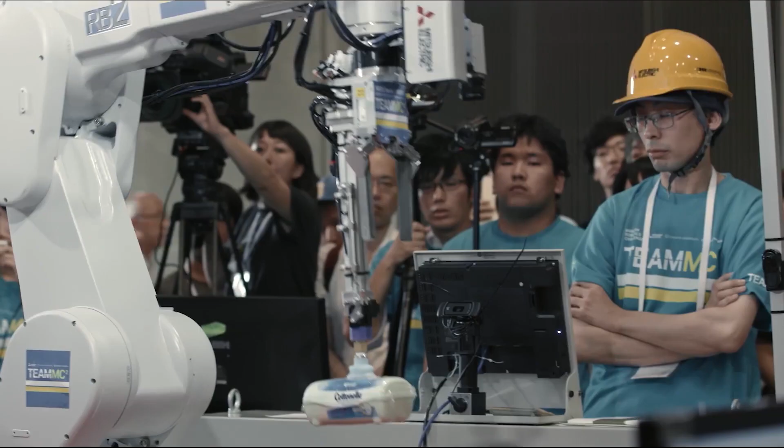Robots are the perfect workers. They don't get tired, they never complain, and they always do as they're told. Today, robots are responsible for many things like assembling cars, keeping warehouses in order, and helping perform delicate surgeries.

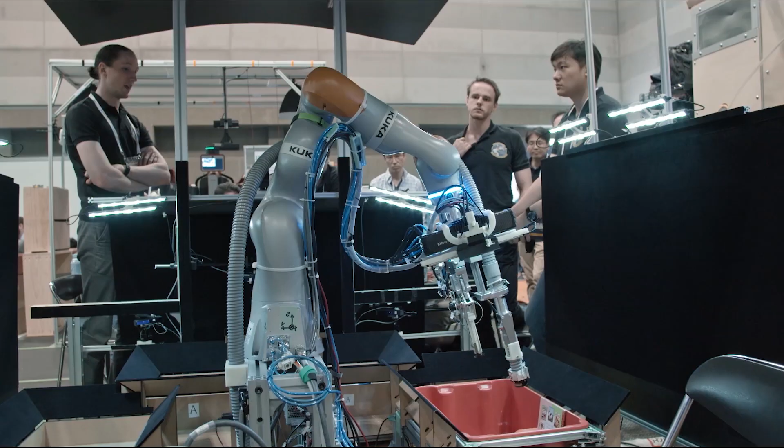But most robots of today are not humanoid. They look nowhere near like a person. Most of them are specialized arms holding specialized tools.

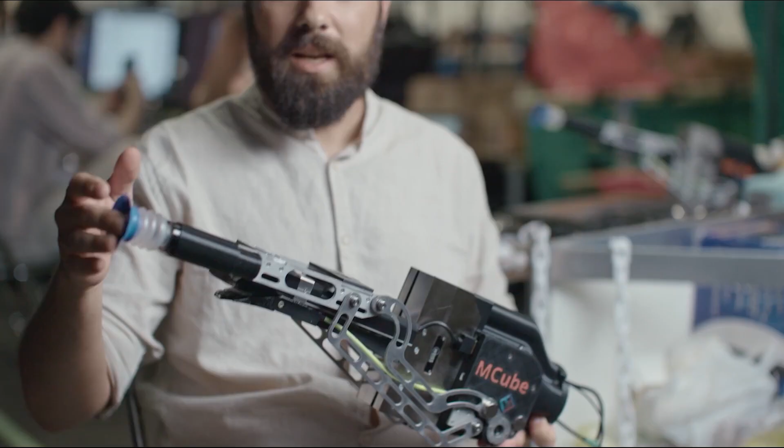If you're a fan of science fiction movies, you may have seen a number of films which have robots as the stars of the show. These movies depict robots as having the shape, the form, the movement, and even the speech of humans. That's the dream. Today, there are very few robots that are designed to look and behave like humans.

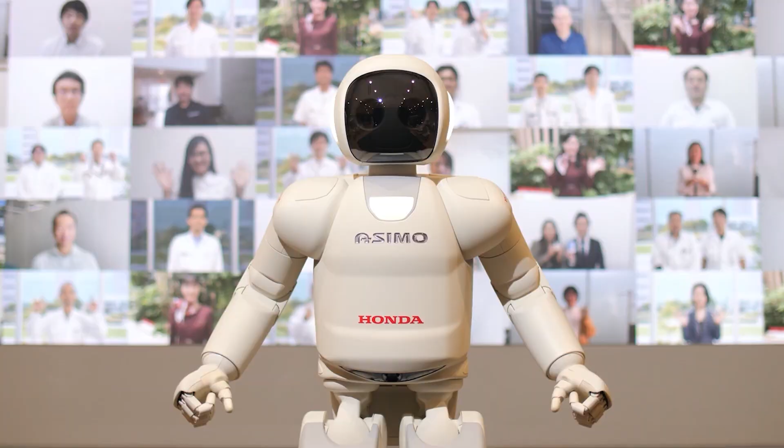One of them is Asimo, the humanoid robot created by Japanese car maker Honda. It's clunky, it's slow, and it still needs help keeping itself upright.

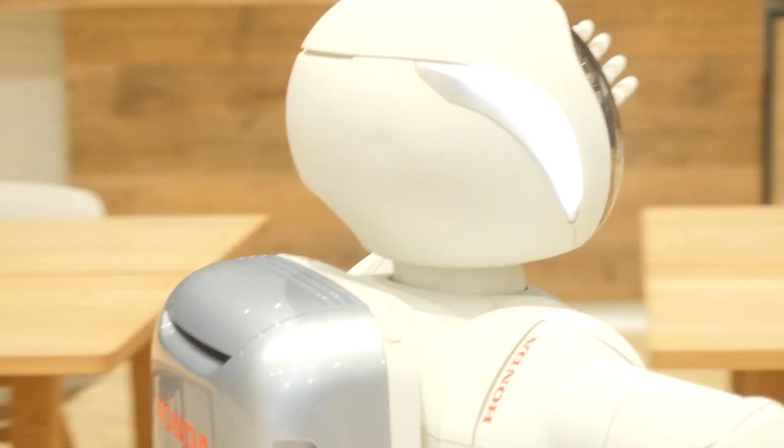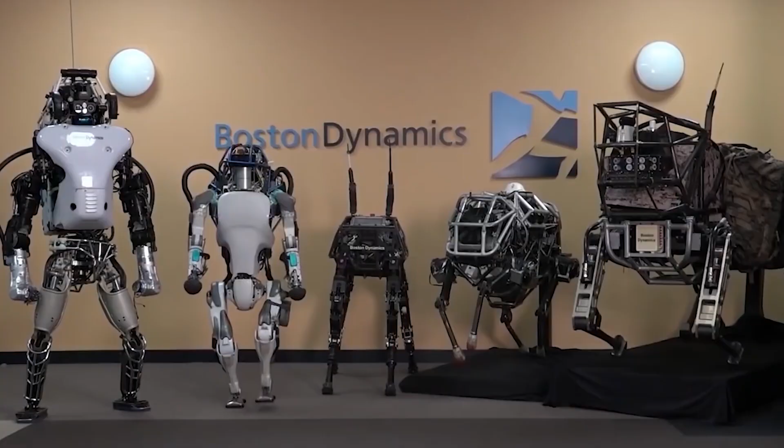Now, there are two companies taking center stage in the field of robotics: Tesla and Boston Dynamics. Boston Dynamics has been making rounds in the news the past few years as they continue to develop a four-legged robot called Spot, which can run fast, like a horse.

Tesla, Elon Musk's electric car company, is the newest kid on the block. Just last month, the company unveiled its Tesla Bot, which looks very much like a human being. Only thing is, it doesn't have a face.

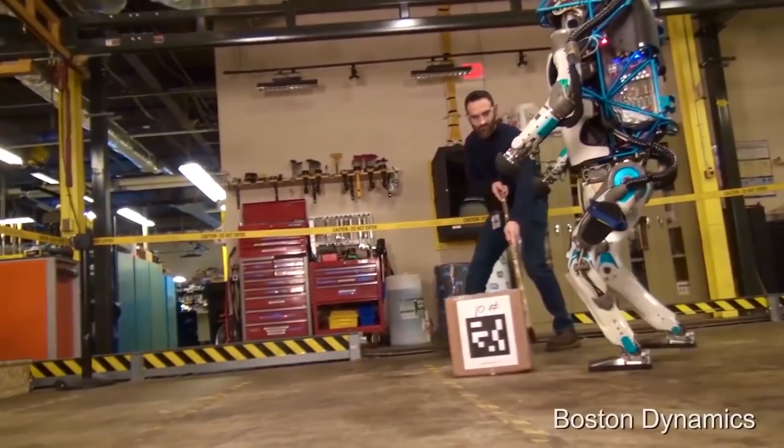On the other side of the coin is Boston Dynamics with its Atlas robot. This is also humanoid, but not as sleek looking as the Tesla Bot. However, Atlas can perform some impressive physical maneuvers.

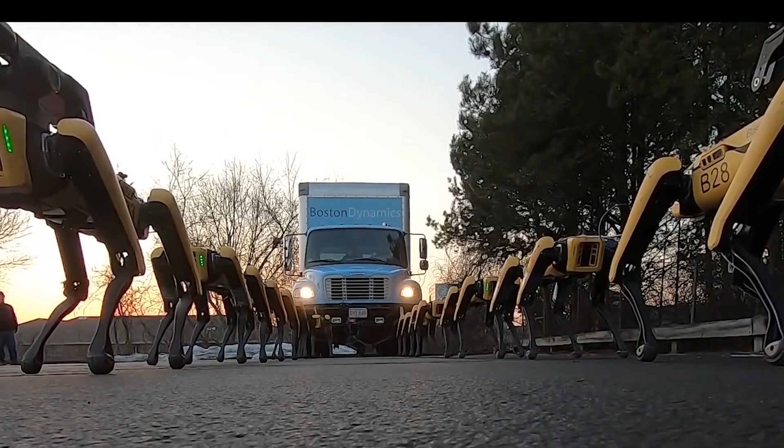So who is poised to win the robotics race? Will first prize go to Tesla, or will it go to Boston Dynamics? Let's find out more about this battle of the bots.

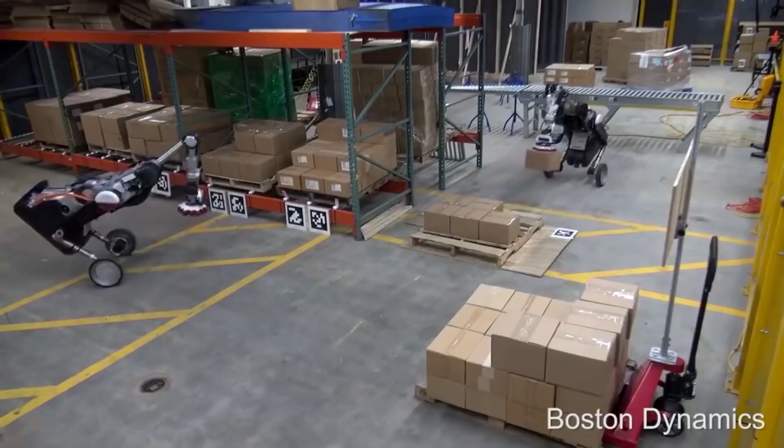Machine workers. For Elon Musk, there are lots of jobs that need to be done, and humans just don't want to do them. He intends the Tesla bot to do tasks which are unsafe, repetitive, or boring for people. That way, Musk hopes to end the shortage of labor.

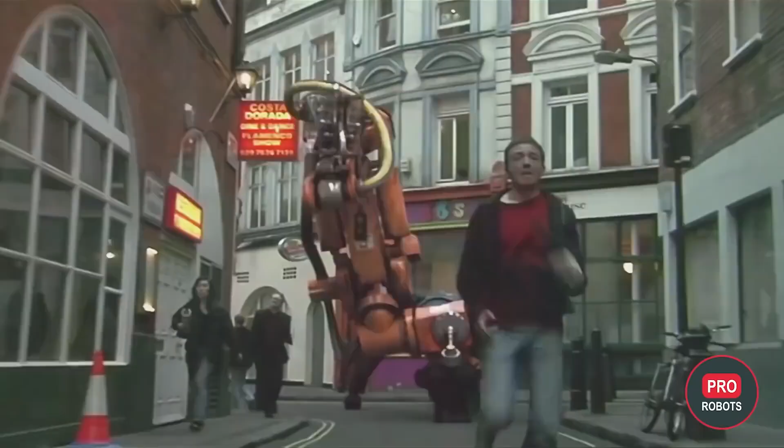The Tesla bot is 5 feet 8 inches tall, and it weighs 125 pounds. Not as heavy as most human beings. Musk doesn't think the bot is too threatening, saying, with a laugh, you can run away from it and, most likely, overpower it.

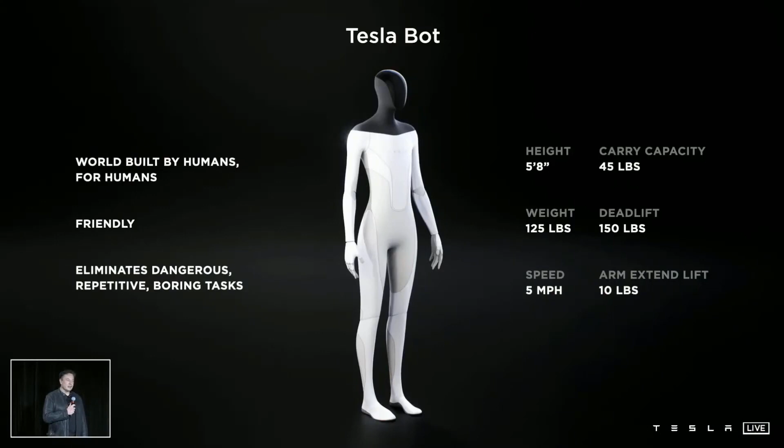But during Musk's presentation of the Tesla bot last month, he didn't give a tech demo. We don't know what the bot is truly capable of yet. Why? Because the Tesla bot has not been built yet. The bot that went on stage during the presentation was a mascot.

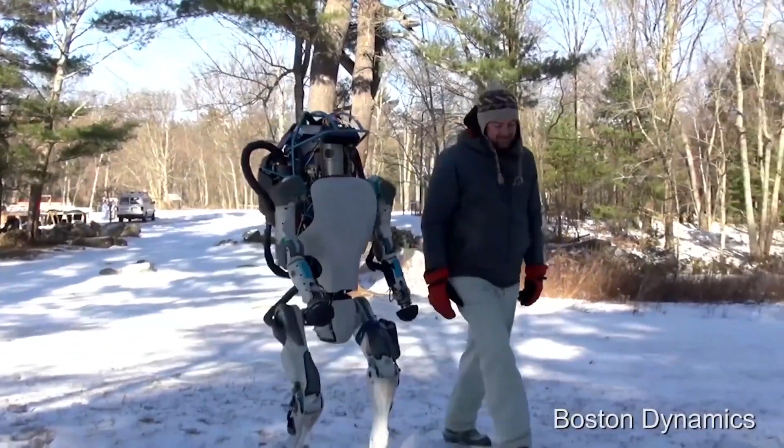Contrast that with Boston Dynamics' Atlas. A video in the company's official YouTube channel revealed the technical capabilities of this humanoid machine. The video, called Partners in Parkour, showed two Atlas robots running through inclines, jumping on platforms, balancing themselves on a narrow beam.

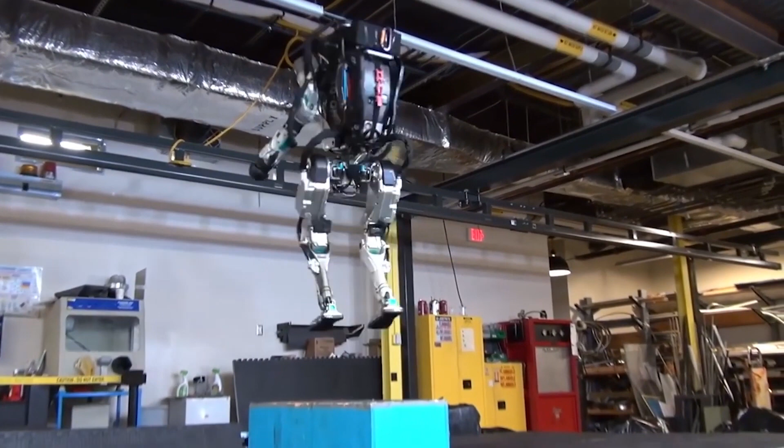And the best part, doing not one, but two backflips. Feats like this would have caused other humanoid robots to fall over. Asimo could only dream of doing such tricks. The balancing capabilities of Atlas, though, allow it to do different tasks with ease. It can carry heavy stuff without tipping over, for example.

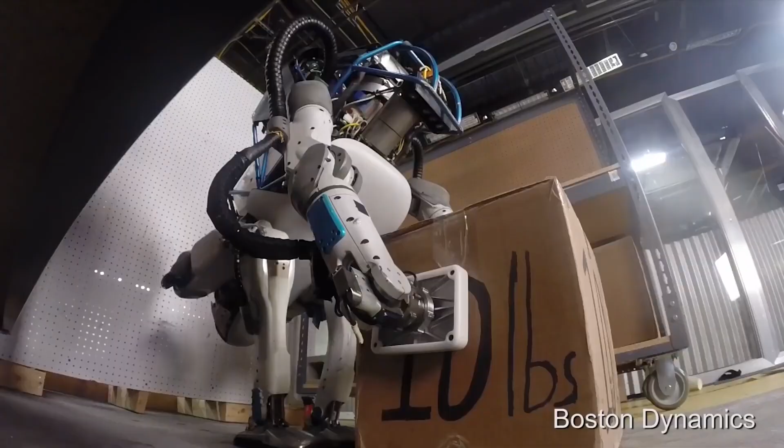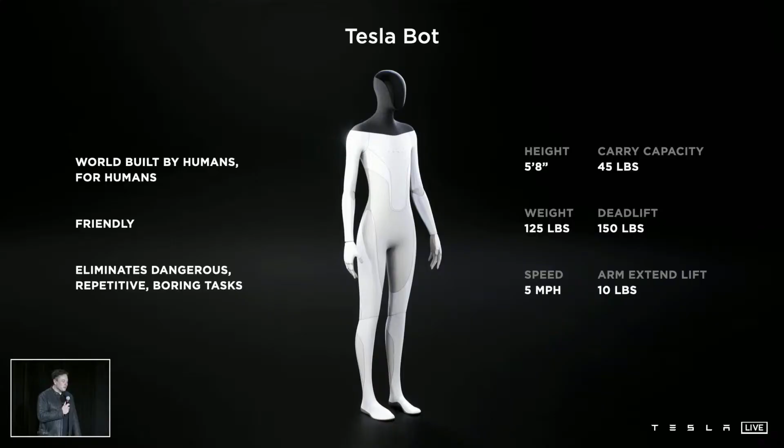As for the Tesla bot, Elon Musk claims that it can carry a maximum of 45 pounds and deadlift up to 150 pounds. Musk said it also has a top speed of 5 miles per hour, but we've never really seen it in action. Is the Tesla bot for real?

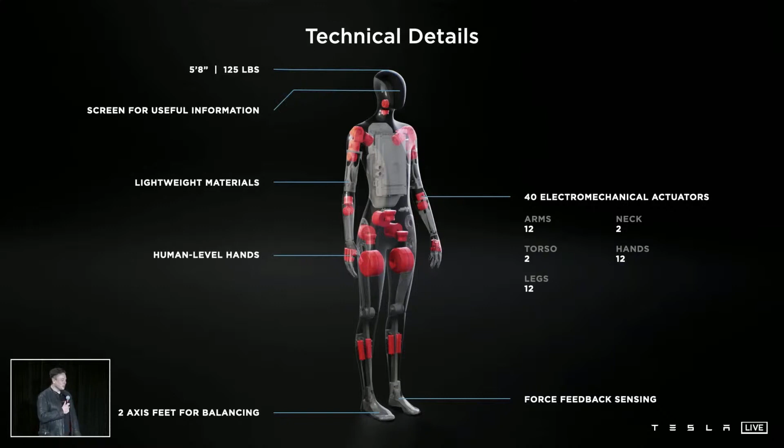As of now, the Tesla bot is not yet real. Elon Musk said that the bot is meant to be a human replacement robot, but no company on Earth has built something like that yet.

According to Musk, Tesla's cars are semi-sentient robots on wheels, so it makes sense to put that into a humanoid form. He also said that a prototype should be available probably sometime next year. The Tesla bots will run on the company's full self-driving software that its electric cars use. Musk even said that the Tesla bots can respond to simple human commands like, please go to the store and buy me a soda.

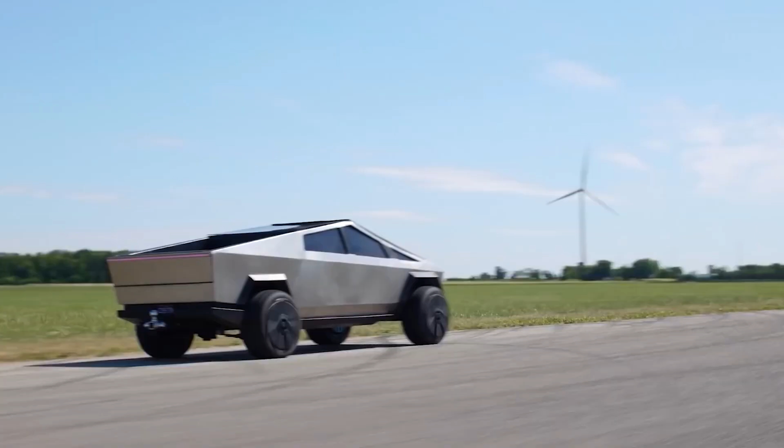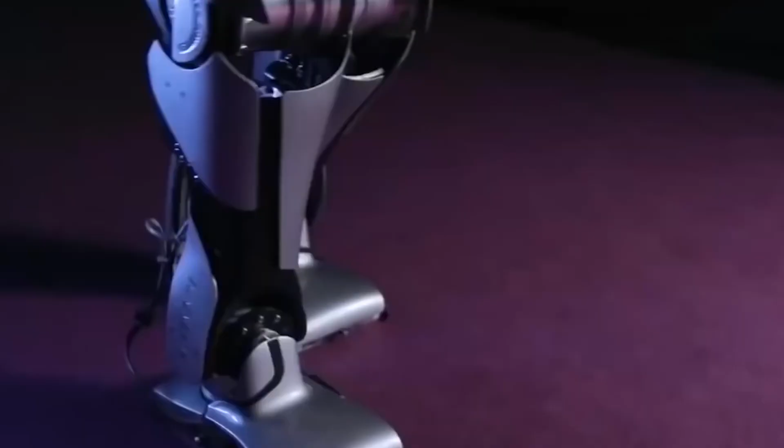If ever, this system will be highly intuitive and could process commands just like Alexa, Siri, or any of the digital assistants popular today. This time, though, it's not just a digital assistant, but a physical one as well. Imagine having a robot butler who will do everything you tell it to.

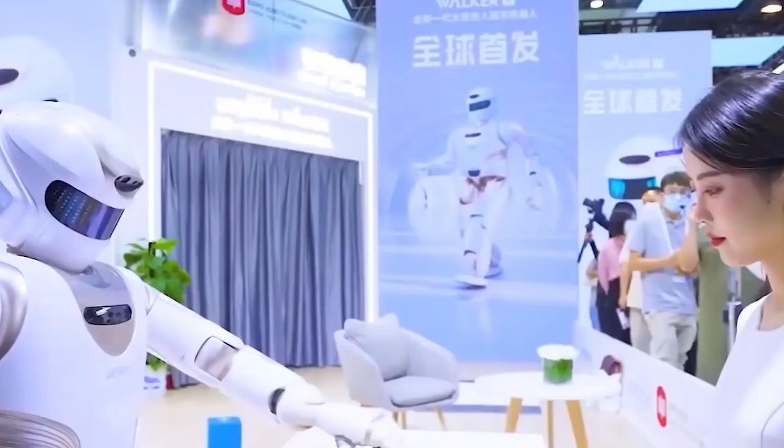After mentioning the possible things you can tell the Tesla bot to do, out came the demo: a human in a spandex suit. Pretty anticlimactic for something so hyped up at the beginning, to say the least. If Tesla can pull it off, and they do have a working prototype by next year, it'll be a huge feat of engineering, but there will likely be a lot of bugs to quash.

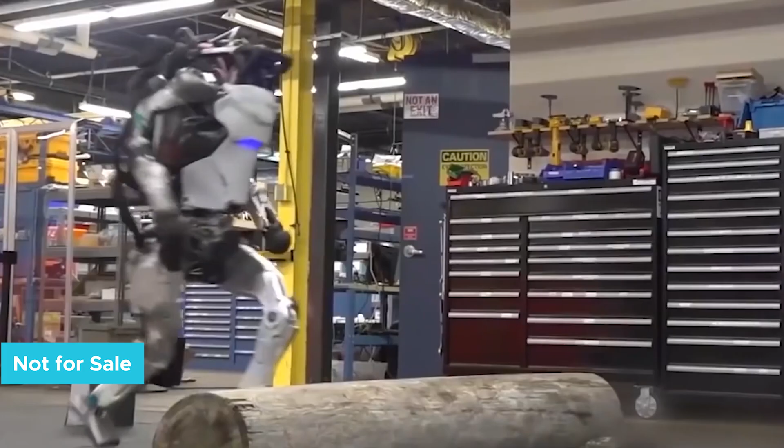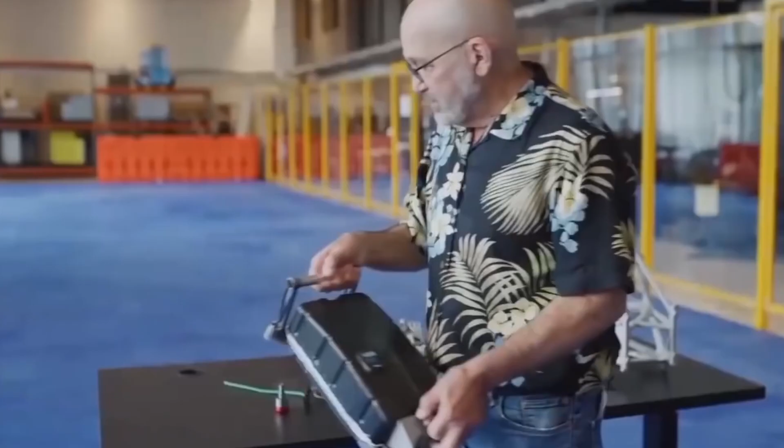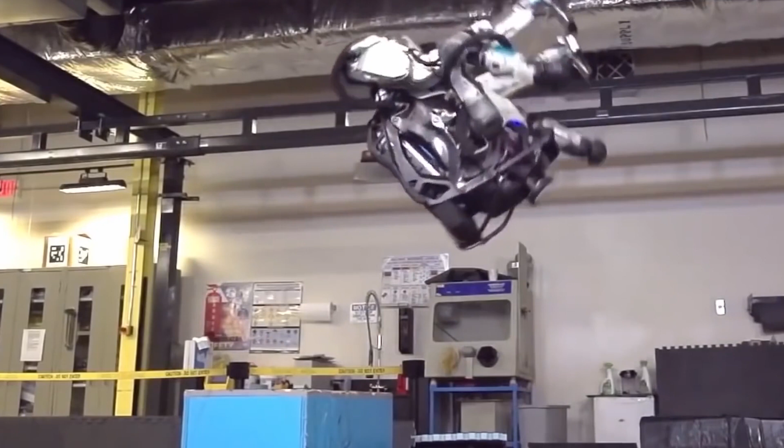Not for sale. Even Boston Dynamics' Atlas won't be in stores anytime soon. The company has said that Atlas and its other robots are for research purposes only. They never said that Atlas will become a replacement for human workers. Atlas in particular was created to push the capabilities of robotics to its edge. According to Boston Dynamics, the robot is not even close to being commercially available.

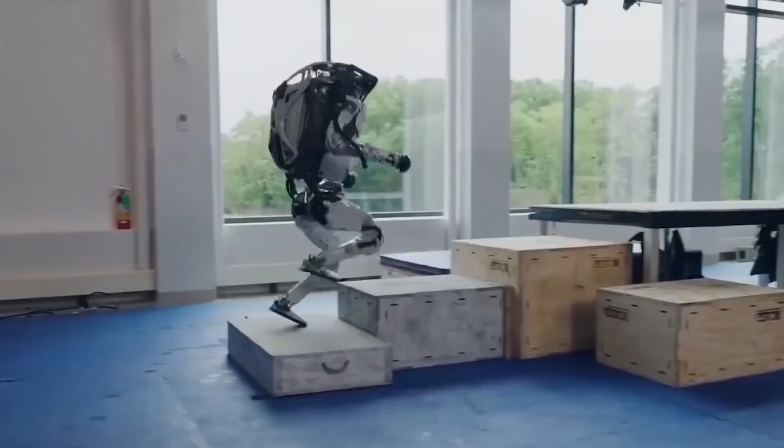That's despite the company having spent more than 10 years developing Atlas. Here's another reality check: despite Atlas showing impressive physical skills, it still trips and falls. Often, this robot is nowhere near perfect, kind of like me. With this in mind, it's highly doubtful that Tesla can replicate this technology in the matter of a year.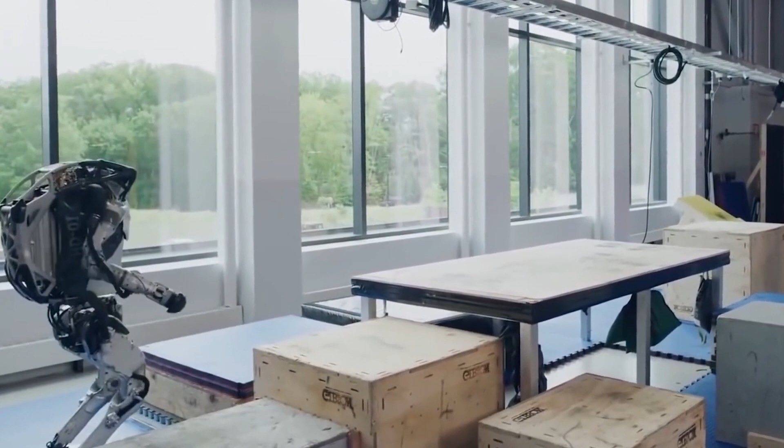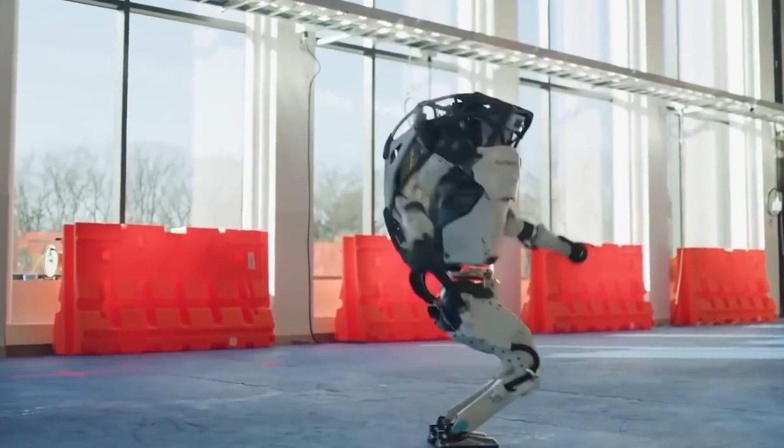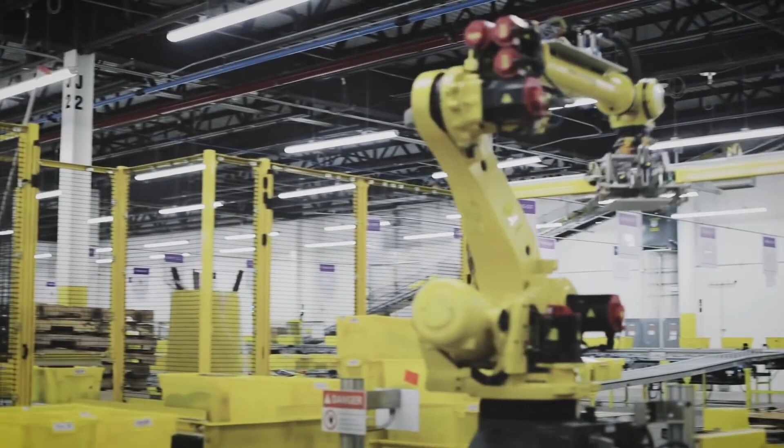Robotics engineers like Carl Berry from the UK's University of Central Lancashire say that this is an unrealistic expectation, not unless they copy Boston Dynamics' designs completely, which is a violation of intellectual property rights. Also, according to Berry, using robotics and AI for manufacturing does not require machines to look human. Instead, it's a lot more efficient to make the simplest possible machine. That's why most factory robots are just huge arms with specialized tools as hands.

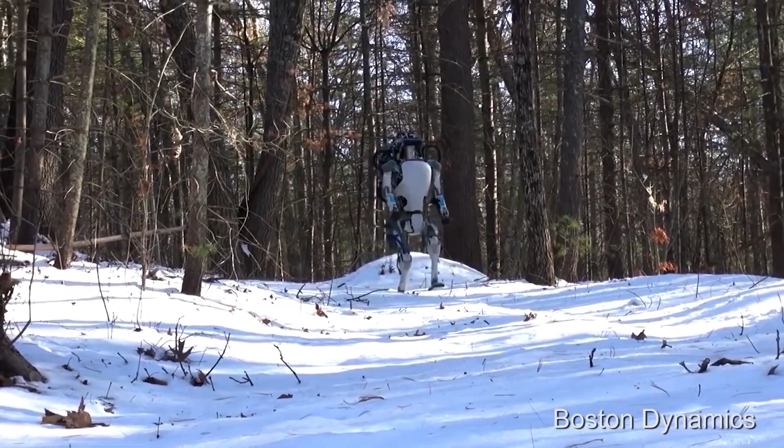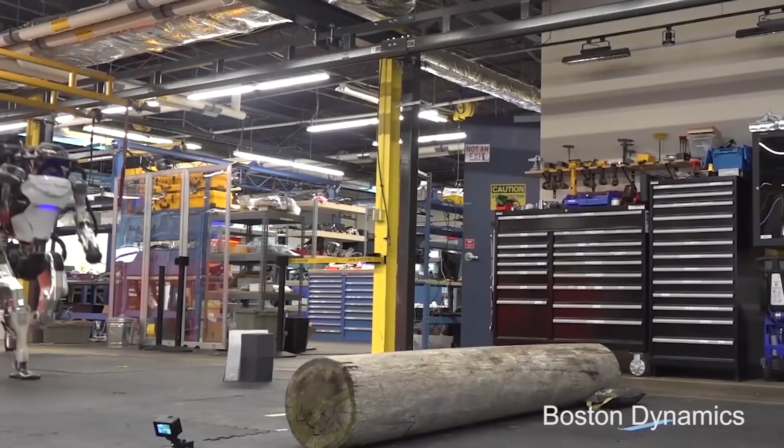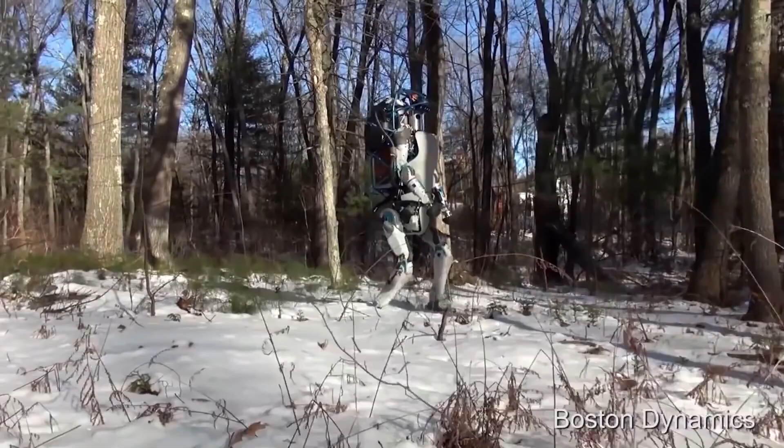Programmed parkour. Atlas is still a robot, so its moves have to be carefully calculated and meticulously programmed. Even the environment in the Atlas parkour demonstration is carefully designed to ensure that the robot can handle the course. Just like humans, Atlas bots are prone to slipping and sliding. Again, like me. Engineers had to teach Atlas how to adjust in case its feet slip, and anytime that happens, Atlas will automatically right itself so it doesn't fall over.

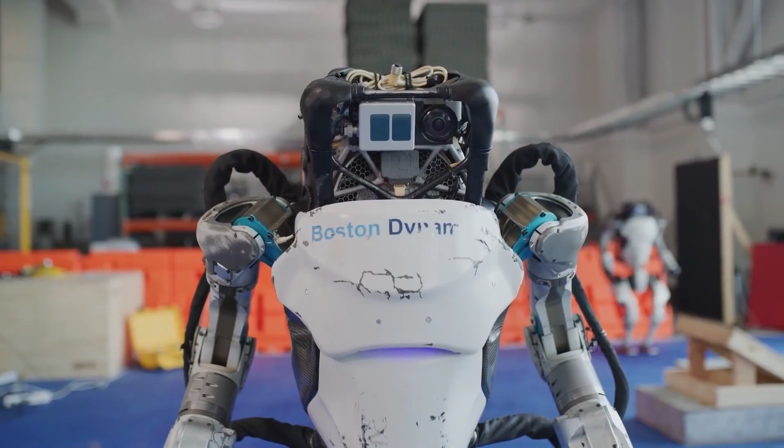Engineers also tested Atlas's ability to adjust by changing the environment. For one, they changed the geometry of the course. Another thing they do is change the surfaces: wood, asphalt, grass, mats, and others. They don't inform Atlas that the surfaces are different either. The robot itself can adjust when presented with new environments.

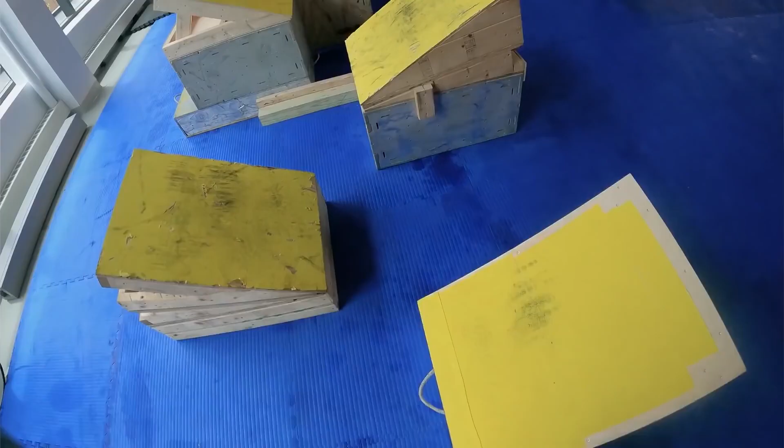Boston Dynamics engineers also mentioned that they did not take advantage of machine learning. Instead, they implemented optimization calculations to program the robot's parkour moves. However, the engineers admit that not everything can be tackled by optimization. Thus, in the future, they intend to use machine learning as well, especially for behaviors that involve complex tasks, for instance manipulation tasks that require robot vision.

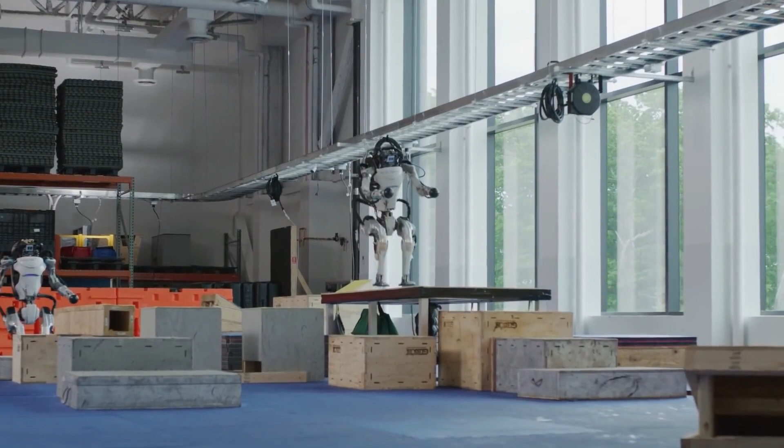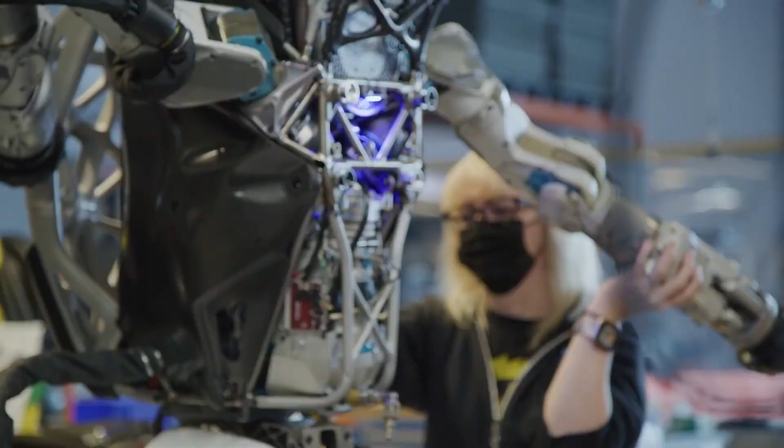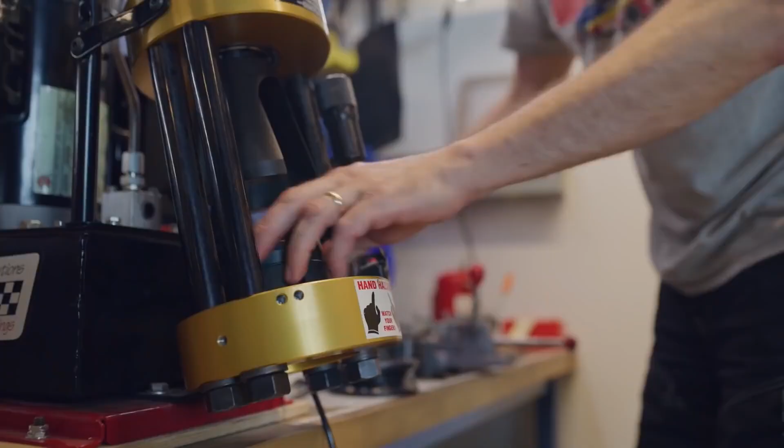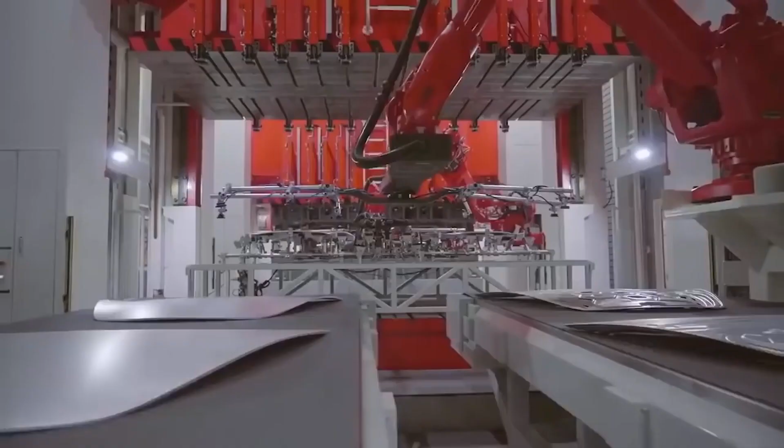Well, it seems that humanoid robots will not be commonplace anytime soon. The technology is still new, and even with companies like Boston Dynamics and Tesla battling it out, the process is still slow and steady. Boston Dynamics took 7 years to develop Atlas into what it is today, and the company is continuing to improve the robots. Tesla, on the other hand, wants to develop a humanoid robot capable of doing meaningful work in just 1 year. Only time will tell if Musk and company can pull it off.

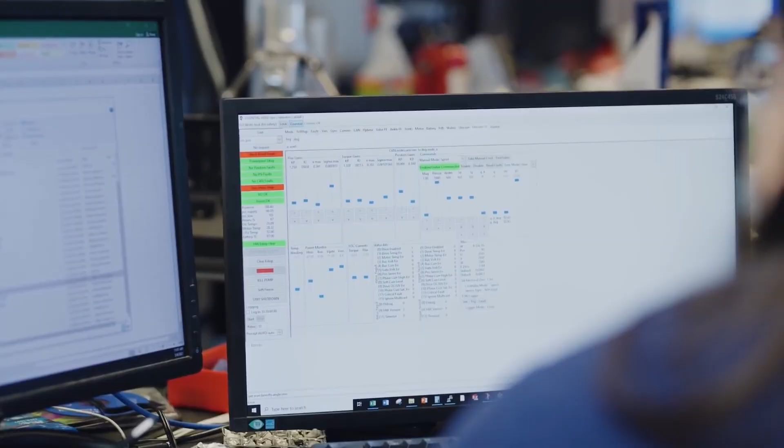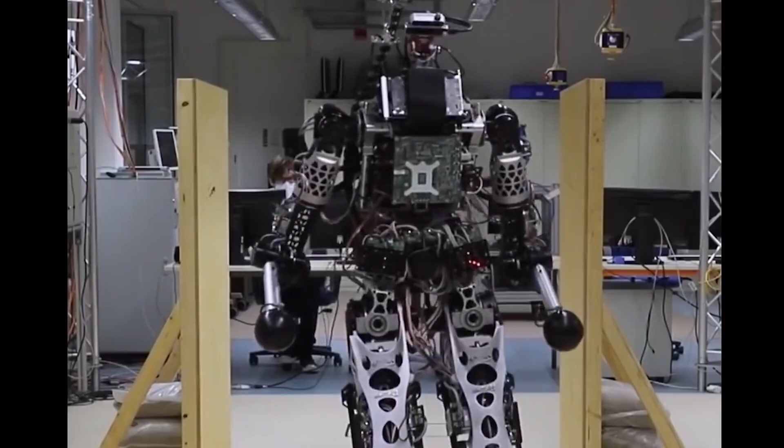If you're wondering when you can have a robot butler, hold your horses. That won't happen just yet. Robotics engineers have a lot of kinks to iron out. Besides, it's the robotics engineers themselves who say that robots don't necessarily have to look human. The most efficient robots are the simpler machines suited for specific tasks. As far as the engineers are concerned, humanoid robots are just much too complicated for their intended purposes.